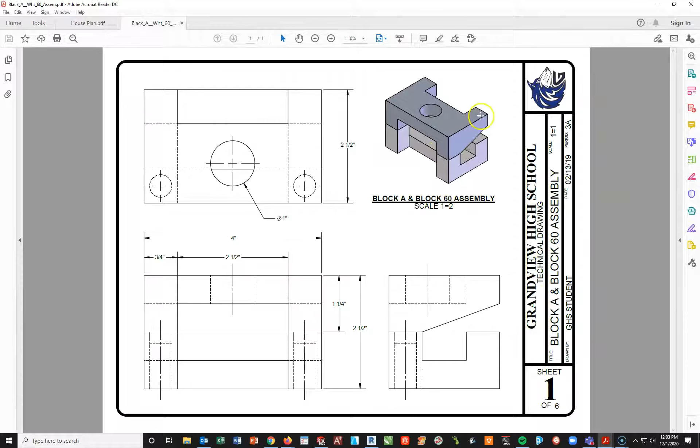What we're going to do now is start by going into SOLIDWORKS and do a file new. Now it's really important to understand that SOLIDWORKS templates does not have an assembly template. We don't have anything in here for assemblies. These are only for parts and drawings.

So you need to go to a tab called Tutorial. You should see it in your folders there. You're going to have to hit the word Assembly or Assemb and hit OK.

Now when this opens, it's going to be looking for the part, so it automatically opens to the last folder you've been working from. I've been working from downloads - you can see I've been downloading people's parts, printing and grading. I actually have my parts stored in my H drive, in my Tech Ed 1 folder.

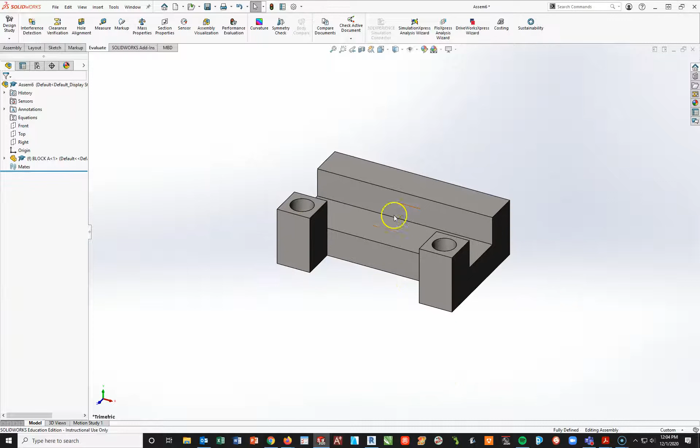I'm going to open up with Block A first. I'm going to left click on it and hit Open. This block is going to be pretty straightforward. I'm just going to find it somewhere out here on the screen, left click, and put it into its spot. So this first block is where it needs to be, just sitting there in space.

What I'm going to do next is go to this tab up here called Assembly. This gets added in when you start a new assembly - it's a new tab that gets created. When I left click on this, I need to insert another component, so I'm going to click on this button here called Insert Components.

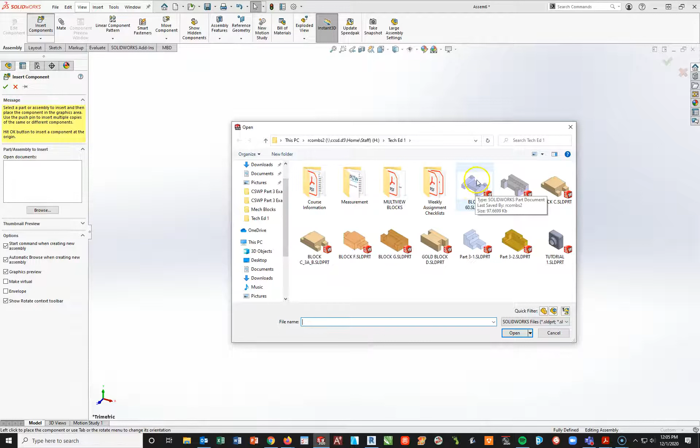Again, I need to browse for it. Now the good news is as soon as you open or insert, it's going to open the previous folder you were pulling from, so in this case that works out well because there is my Block 60 right here. I'm going to left click on that block and say Open.

Now I'm going to basically place this somewhere above this. I'll back this up and just kind of eyeball it above, and left click. Now it's important to understand this part I can move anywhere I want - it's just like the three-dimensional model in a drawing. This one is fixed in space, so the only one that can really move or do anything is White Block 60 right here.

Now what I want to do is flip this thing over so it's on the other side, so these pegs are down and lined up with these two holes. To do that, I need to rotate this part over. The way you have to do that in an assembly is up here where it says Move Component on the top bar - drop the arrow down, and go to Rotate Component.

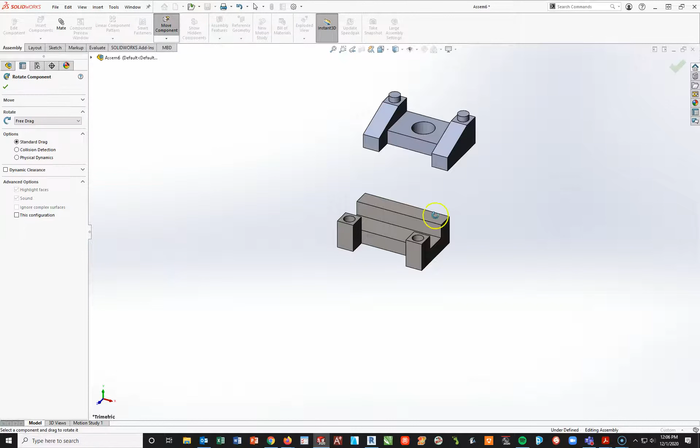Now all you have to do is left click anywhere on this part, hold your mouse button down, and begin to rotate. You're going to have to move your mouse around. It takes a little bit of practice, but as long as you get it somewhat flipped over so that the pegs are basically facing towards the holes and these two legs are facing towards the back, you are good to go. So that's good enough right there.

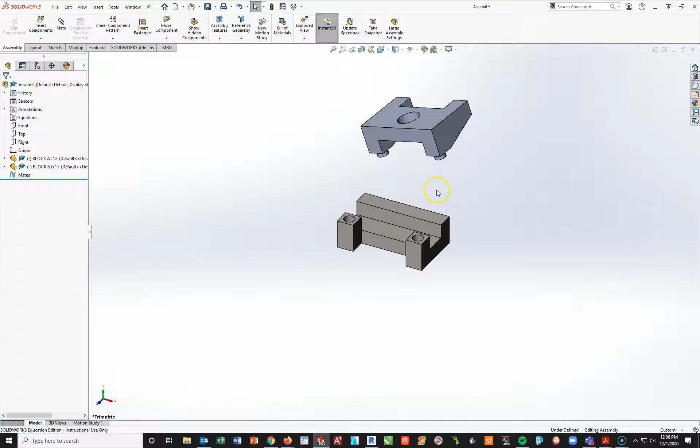To turn the tool off, just like we've done before, I'm going to hit Escape. Now what I need to do from here is take that peg and line it up with that hole. To do that, we have to go to Mate, right here. It's very similar to the relationships we've been using, and I know we haven't talked much about those, but this ties into some of the sketching we've done.

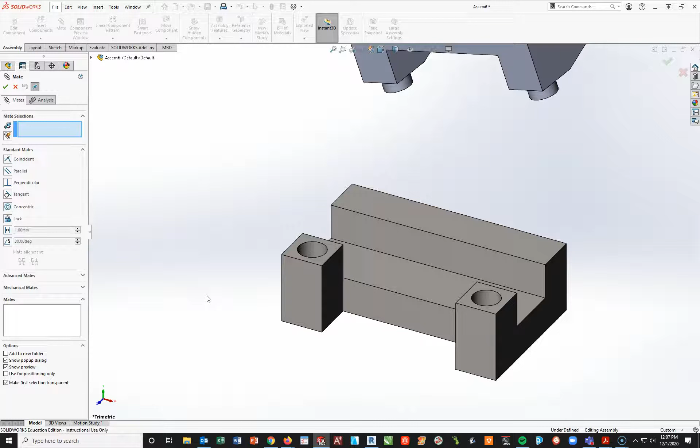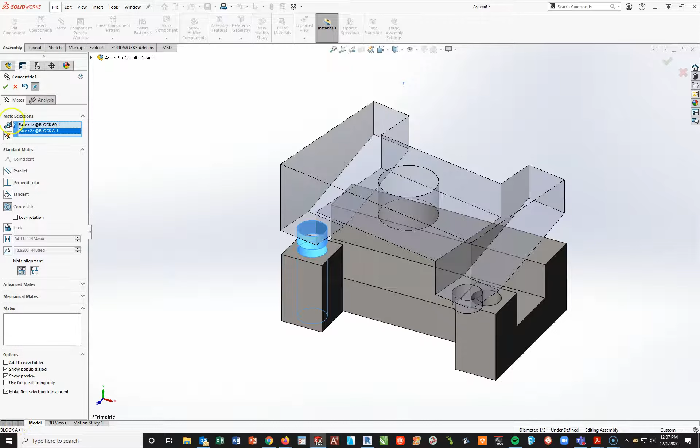I'm going to mate the outside of this peg. All I'm going to do is put my cursor on there and left click - the peg goes blue. I want that outside edge of the peg or face of the peg to line up with the inside face of this hole, so I'm going to left click. Now what it does is automatically line that up in the holes. You can see in slow motion here, it's going perfectly into that hole.

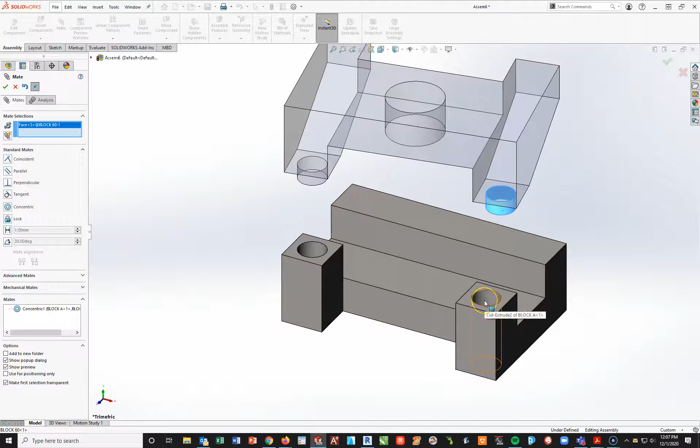Now the problem is it's still spinning. It's not quite where it needs to be because we need to do the same thing with this peg over here. So I'm going to click on this peg here and click on the inside of this hole, so now that this peg also lines up with its hole. So now if I were to move this part, I'm just left clicking and dragging.

Okay, you can see I can't rotate it, but now the pegs are perfectly aligned to the holes. This is called concentric, where the centers are lined up.

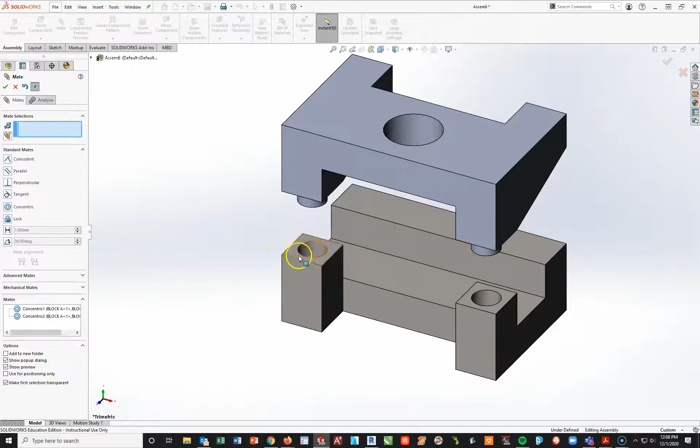Now the last part is I need this face of this block to be glued to this face around the peg. So I'm going to click on this face here so it turns blue, rotate over by holding my middle mouse button down, and hit this face right here. SOLIDWORKS will automatically make these two coincident, which I like to think of as gluing them together. So I'm going to glue them together.

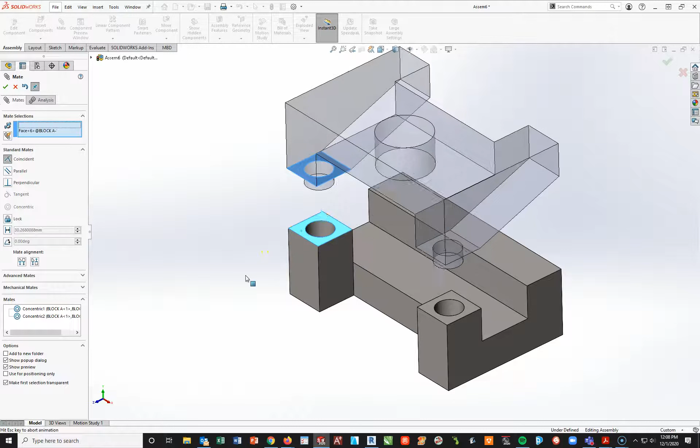Okay, now at this point this thing cannot move anymore. Neither can this block, it can't rotate. It's perfectly fixed where it needs to be. So at this point of the assembly, we are done.

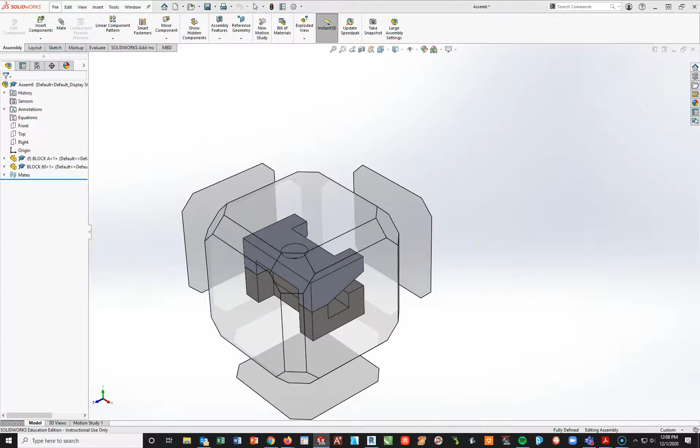I'm going to hit my check mark, space bar. I'm going to go ahead and do my isometric view here, pull this over, turn that box off, go to isometric view.

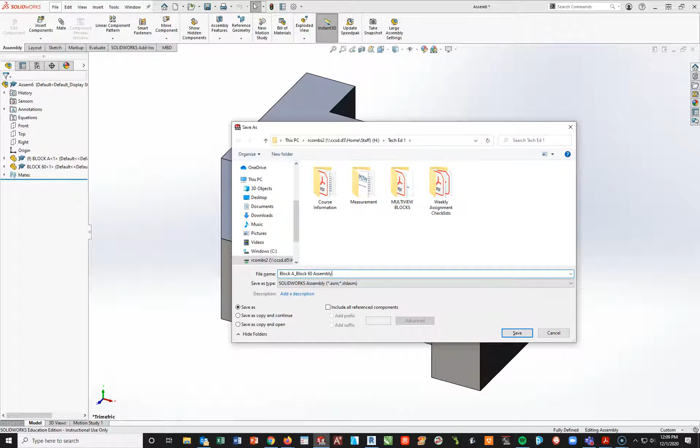Now I need to save this, so I'll do a quick Control S for save. I'm going to save it in my TechEd1 folder, save it as block A underscore block 60 assembly, and hit save. You have to save it before you can put it into a drawing.

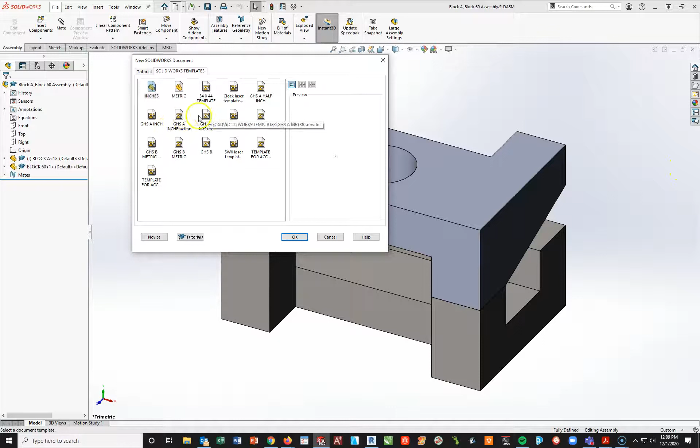That's very important. Now from here, all I'm going to do is another File, New. We're going to go back to our SOLIDWORKS Templates tab, and since this was done in inches, we're going to open up a GHS A inch fraction and say OK.

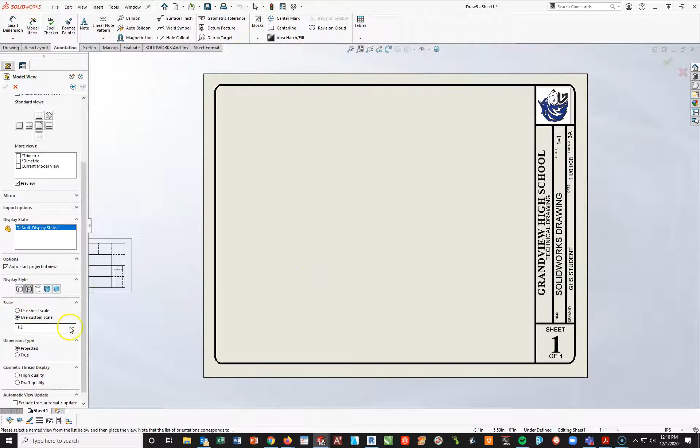Now over here where it says Open Documents, I'm going to double click. Just like we've done in the past, I'm going to start with a front view, make sure my preview's on, and I have hidden lines visible. I'll also make this at a 1:1 scale, going Custom Scale, 1:1 - this should be familiar from the other parts we've already done.

I'm going to start by dropping this in the left-hand corner, pull straight up, left-click, pull to my right, left-click, and then pull up at a diagonal and left-click. I'm going to hit Escape to deactivate the tool.

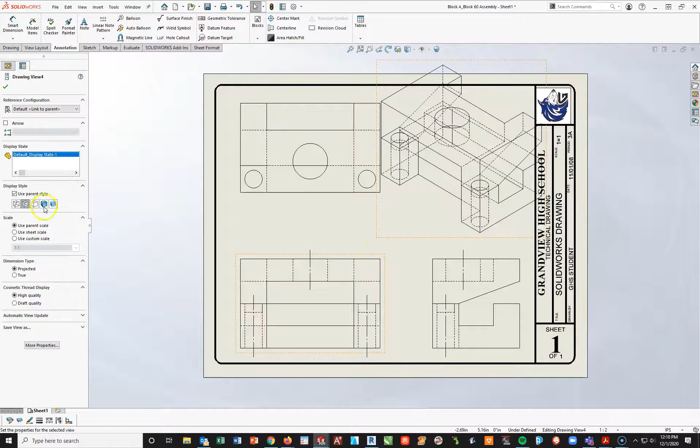Now with this first one up here, I'm going to left-click on this and change it to a color, and change the scale from 1:1 to 1:2. I'd also like to highlight and get rid of any extra black lines that shouldn't be there, so I'll highlight these little lines here and hit my Delete key.

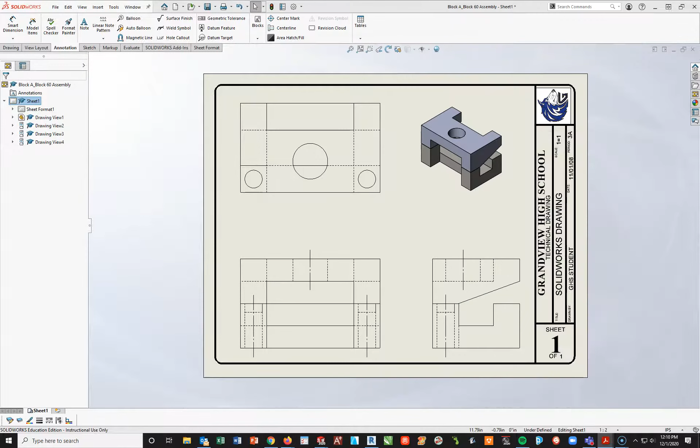Okay, so now I'm going to put on some dimensions. I'll look at my drawing one more time here. I see that I need to have some dimensions on here and a title. I'm going to slide this over to my other screen so I can see this, and turn on my Smart Dimension tool to begin adding some dimensions.

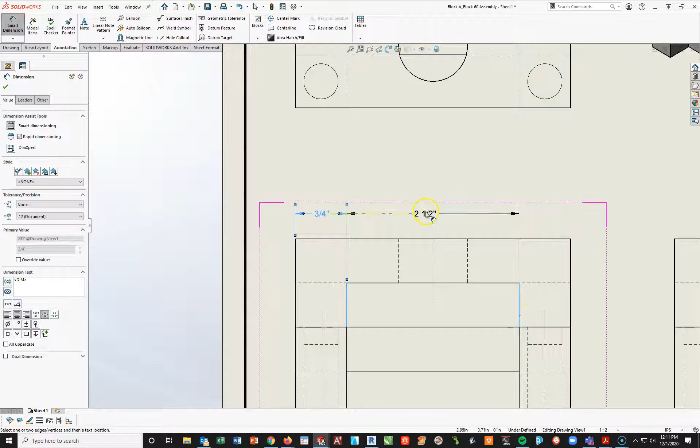I'm going to start from this left-hand side to this line right here and get my 3/4 inch. I'll hit the little dot at the back of the arrow to get it in. Okay, get the arrows in. From this side here to this side here, I'll pull up, left-click. From the far left here to the far right, pull up. From this line here to this line up here, pull to my right. And then from the very top to the very bottom, pull again out to my right.

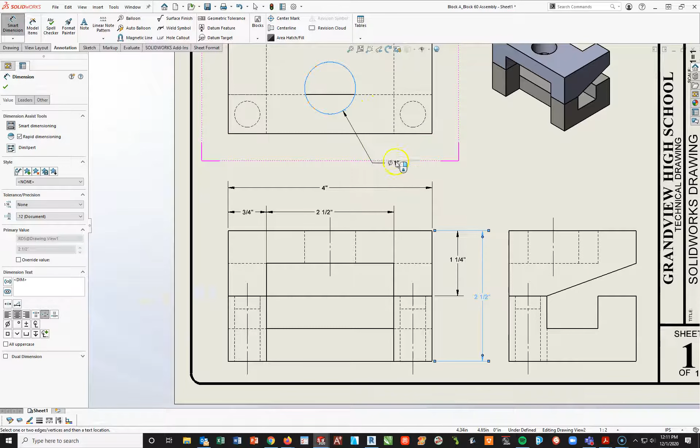I'm going to come up to the top, click here, hit this right-hand line, and click here.

To do a center mark, all I have to do is go to my annotation toolbar and hit this little symbol right here. When you turn it on, all you have to do is click on the outside edge of each circle and left click, and then hit your check mark.

Now, last things we've got to do here - we need to go in and change our title block. Caps lock on, first initial, last name.

SOLIDWORKS drawing, we're just going to put here block A and symbol, block 60 assembly. Oh, gotta learn how to spell, better typing. Assembly. Okay, I'm going to adjust this title by just dragging a little bit. The date, 11/30/20. Period 3A, scale 1 to 1.

Okay, last thing we need to do is also add in a title right here. So I'm going to go to my note tool, left click, change the font size to 12, bold, underline, and centered, caps lock on. Block A and block 60 assembly. Enter. Take your bold and underline off. Scale 1 equals 2. Click outside and hit escape.

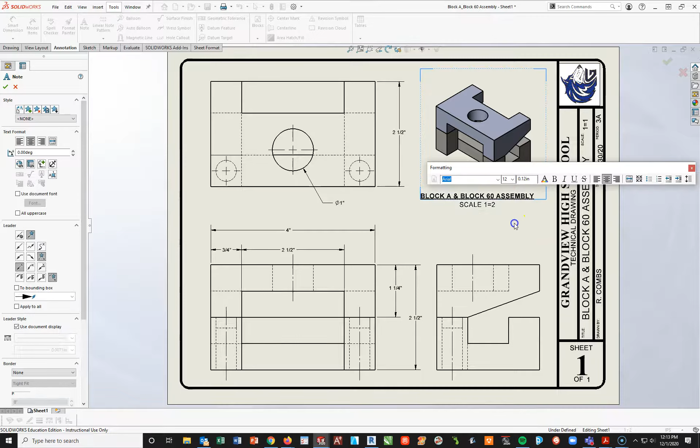Okay, now at this point here, I want you to do Control S, yes to update the views before you save. Go ahead and save it as you see into your folder, and then finish by uploading this into Schoology, and this part will now be done.